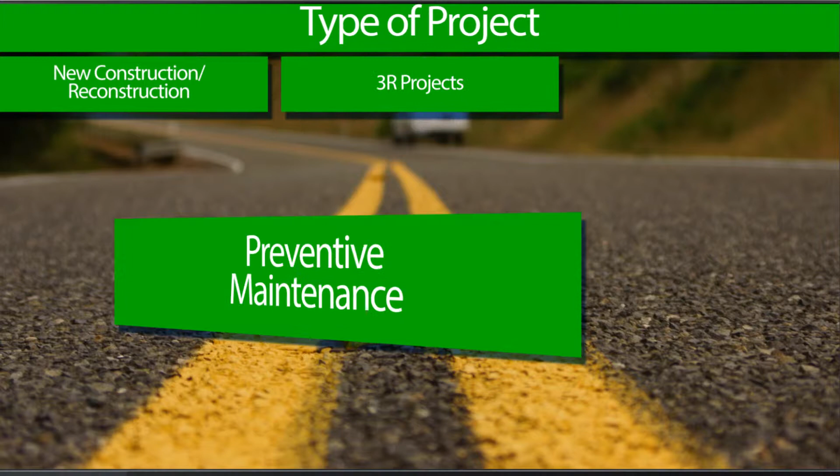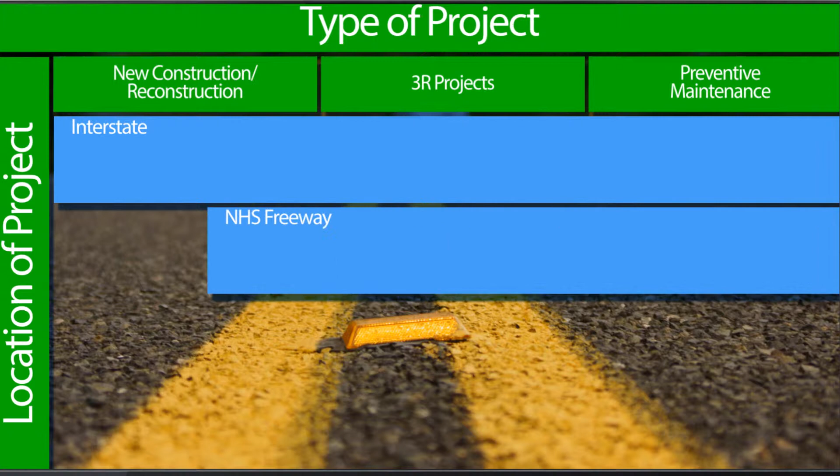Other state-approved design standards. To determine which design requirements apply to your highway project, you first should consider the type of project and where it's located. Project types generally fall into one of 3 categories based on the scope of work: new construction or reconstruction projects, resurfacing, restoration, or rehabilitation projects, more commonly referred to as 3R projects, and preventive maintenance projects. Geometric design requirements apply to projects on one of the following 4 categories of roads: an interstate, an NHS freeway, a non-freeway NHS route, or a non-NHS road.

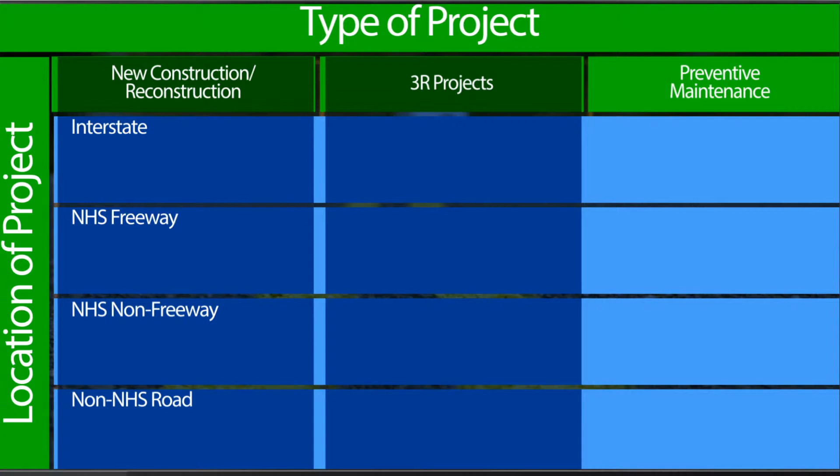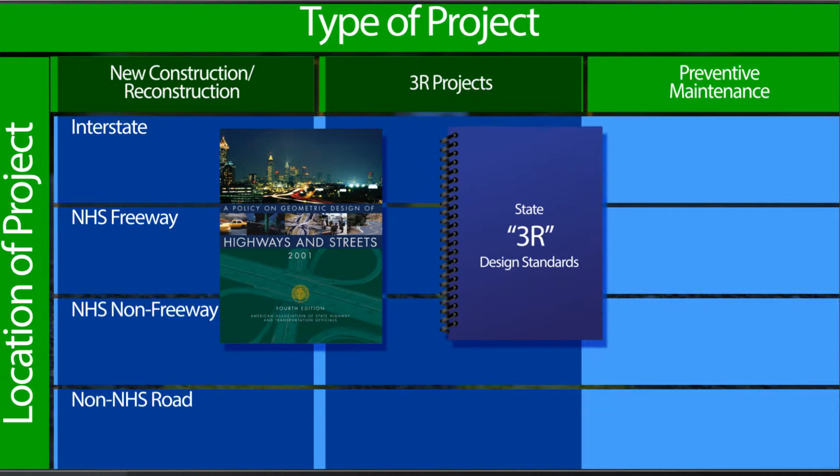All new construction and reconstruction projects on the NHS, as well as any 3R projects on an NHS freeway, must be designed to meet the FHWA-adopted edition of the AASHTO Green Book. FHWA has also approved the use of state design manuals in lieu of the AASHTO Green Book in some states. AASHTO's A Policy on Design Standards Interstate System are the design requirements for all new construction, reconstruction, or 3R type projects on the interstate highway system.

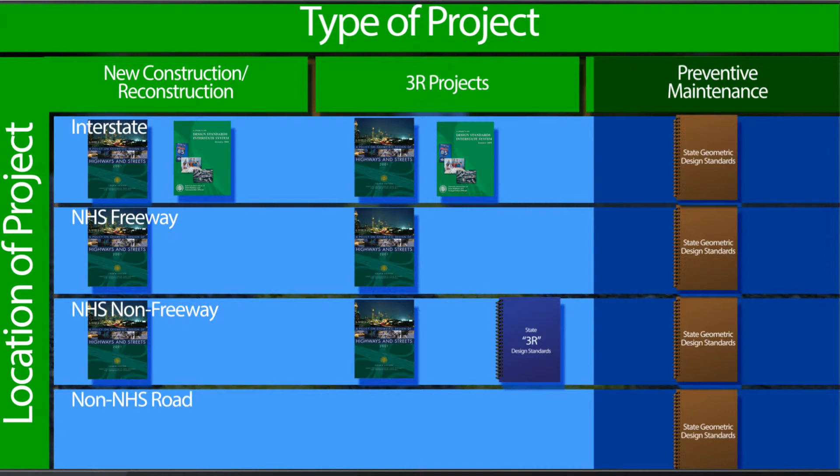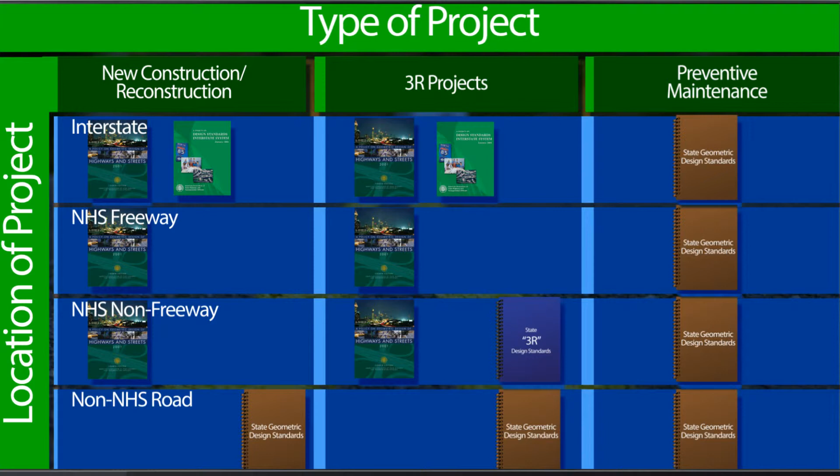A 3R type project located on the NHS but not on the interstate or an NHS freeway may be required to be designed according to your state's FHWA approved 3R design requirements. If your state does not have approved 3R design requirements, then either the AASHTO Green Book or your state's approved design manual requirements apply to your project. Any preventive maintenance type project located on the NHS must comply with your state's design requirements established for preventive maintenance type projects. You are responsible for determining your state's preventive maintenance design requirements as they vary in each state. If you are responsible for any type of project located off the NHS that uses federal aid funds, you must adhere to applicable laws and design requirements required by your state.

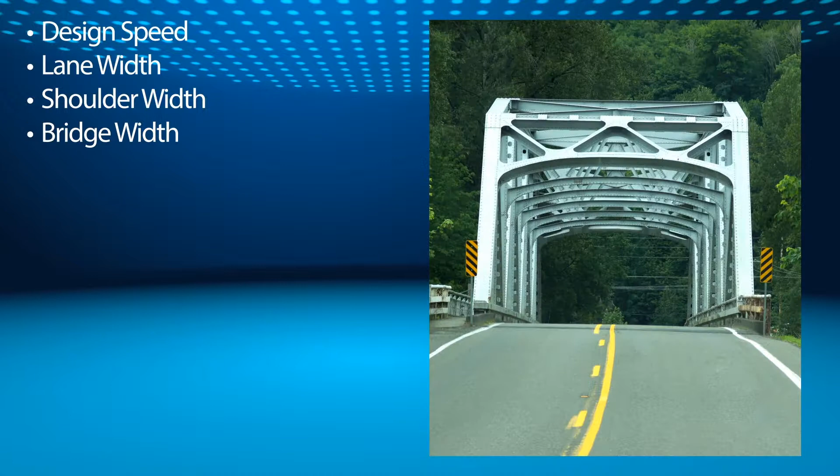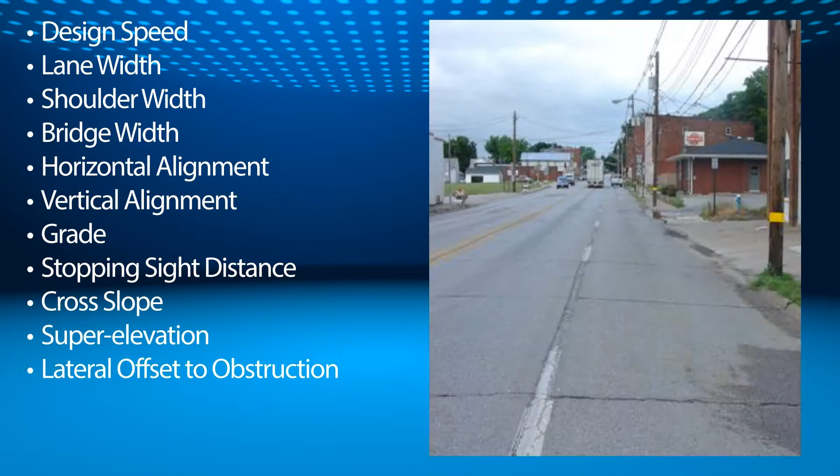The design criteria found in the AASHTO Green Book provide substantial flexibility to address specific conditions encountered on projects. Among the thousands of design features listed in the AASHTO Green Book, FHWA recognizes the following 13 criteria having considerable importance to the operational and safety performance of any highway: design speed, lane width, shoulder width, bridge width, horizontal alignment, vertical alignment, grades, stopping sight distance, cross slope, superelevation, lateral offset to obstruction, vertical clearance, structural capacity.

The FHWA calls these critical elements the 13 controlling criteria, and these cannot be deviated from without first coordinating approval through your state DOT. If you determine that conditions warrant an exception to the applicable design requirement, then follow your state's procedures for requesting a design exception. Design exception requests must consider all project conditions, including compatibility with adjacent sections of road and the expected length of time before reconstruction of the section.

Your written request should detail the considerations and engineering judgment used to analyze and justify the design exception. Include details of how you considered the costs and impacts of meeting the design criteria, the risks involved of not meeting the criteria, and any other relevant factors, such as traffic volumes or speeds, or the extent to which the design criteria cannot be met. If you are considering a design exception, it is important to emphasize the mitigation strategies you have considered to offset the risks of not meeting the design criteria.

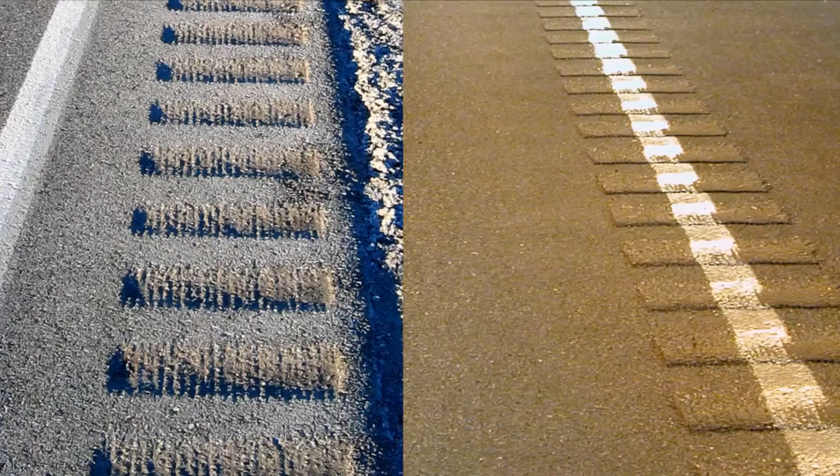For example, what mitigation strategies could you consider to address a sharp, substandard curve ahead? In this situation, your goal is to consider features proven to help vehicles stay on the road to mitigate the risk of building a substandard curve. In this example, you could address this situation by including mitigation techniques such as the installation of warning signs or speed plaques, widening the roadway or shoulders, installing rumble stripes, adding superelevation, or incorporating a skid-resistant high-friction pavement surface.

Your completed design exception request should be forwarded to your State Department of Transportation, or State DOT, which is responsible for facilitating the review and approval process for design exceptions. Check your State DOT's procedures for design exceptions for projects located off the NHS. When a design exception is necessary, the key issue is to allow adequate time in your project planning to get the design exception approved so that your construction is not delayed. Finally, remember that you are required to meet these geometric design requirements on all federal aid projects. Doing so will help you avoid any unnecessary delay in receiving construction authorization for your federal aid project.